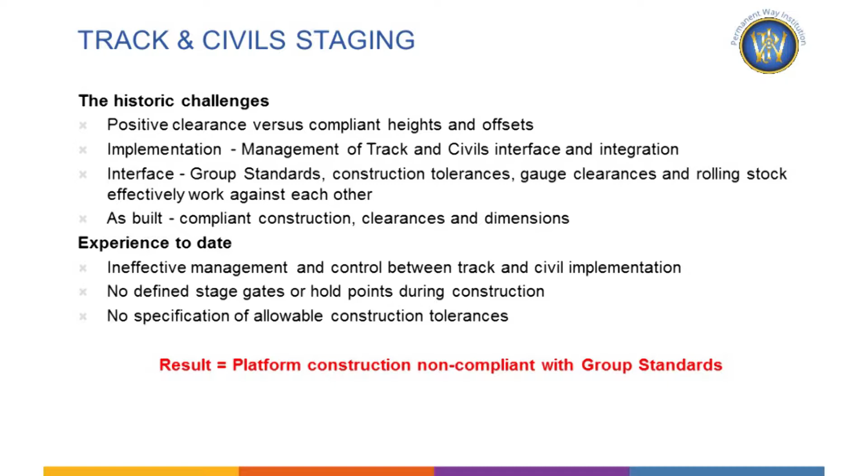And just at the bottom there, the result tends to be, in our experience, a non-compliance to a group standard. It's very difficult then in the end to get past somebody like the NoBo or the certification board, and then needing a derogation, which you shouldn't need in theory.

So items we've put in place across Phase 4 and 5: we developed what we classed, it's quite a snazzy title, an AIDD, Agreed Interface Definition Document. And the idea behind that was to pull together the civils and the track scope. So specification of platform heights and offsets, specification of enhanced construction tolerances where needed.

It coordinates the track and civils activities together with hold points in place and sign-off positions, ultimately ensuring compliance with group standards. And the bottom one, it specifies the key construction sequences and, more importantly, any hold points and handover points.

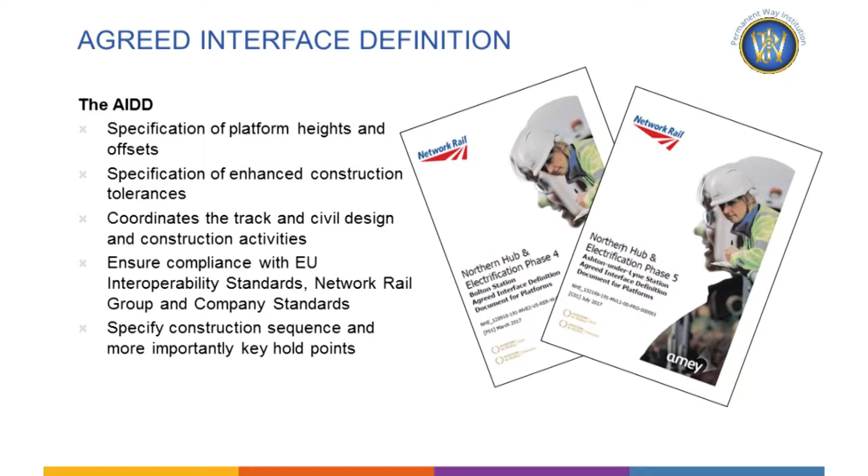And I think Neil touched on this in some of his slides in terms of compliance, and more on this slide in terms of as-built compliance. What does that actually mean? And I think there's definitely misunderstandings of that from a group standard point of view, from a gauging point of view. From a track point of view, it's quite straightforward. It's the track construction standards 2102 for a given line speed is the minimum that we'll achieve unless we specify

enhanced tolerances. In the group standard 7016, again, as Neil touched on, the Y dimension is typically 915, but you have got a 25mm corridor down to 890. And from an offset point of view, 730 plus 15. And the overarching mandate in 7073 is the prime requirement isn't necessarily normal clearances or reduced clearances, but positive clearances, making the best use of clearances versus stepping.

And an important one again that Neil touched on was in standard 7073, the maintain position and the effective position. The maintain position, in our terms, is almost identical to the reference position. It is the design position. And more importantly, the X and Y compliance on site is to that maintain position. It isn't to the as-built position or effective position.

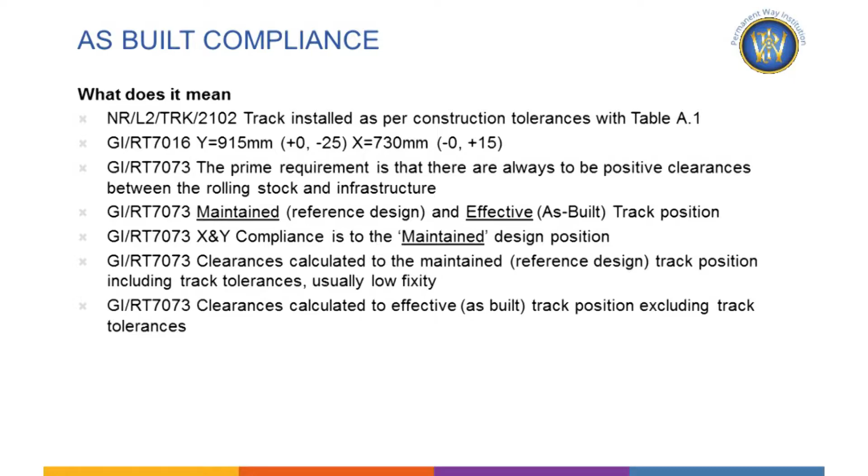And an important one at the bottom that we've worked on over the last couple of years: the design position is using all the track tolerances, whether that be low fixity, medium fixity or high fixity, in the clearances that are calculated. But in terms of the effective position and what is built on site, the actual clearances are calculated, in effect turning the tolerances off. It's a given position on a given day, with the clearances that you end up with at that time. So again, if that's positive, it is a compliance.

We're just going to come on now to some real-life experiences over two stations, Bolton Station and Ashton Station, which between them are both defined as CSM significant projects. So both fully reviewed by NoBo with a safety assessment report and TSI compliance as well.

So Bolton was a 9-day blockade. There's 5 platforms in that which were constructed by Buckingham's. 2 new platforms, Platform 5 and Platform 2, that were CSM significant, and then track tamping and full recopering across platforms 1, 3 and 4.

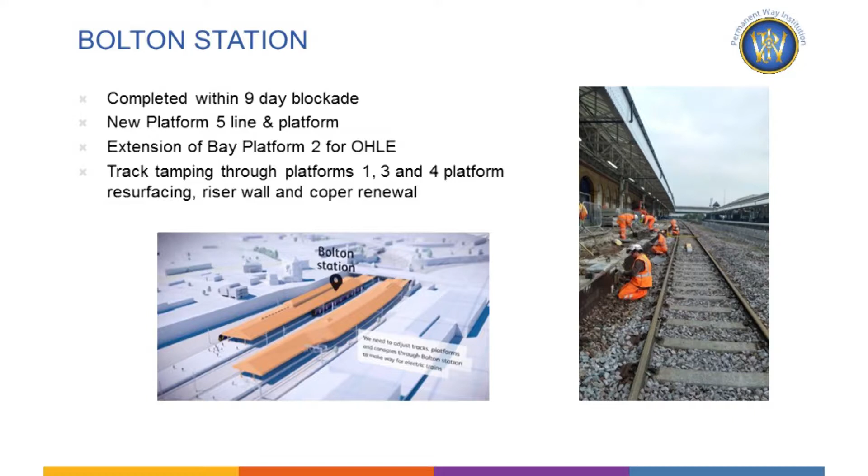We went into this with a type of proposal where we wanted to put in enhanced construction tolerances. So our idea would be that the track was installed first, and we'd build that to a very, very tight tolerance, well inside the track construction tolerances. So track vertically was plus 0, minus 10, and horizontally plus or minus 5.

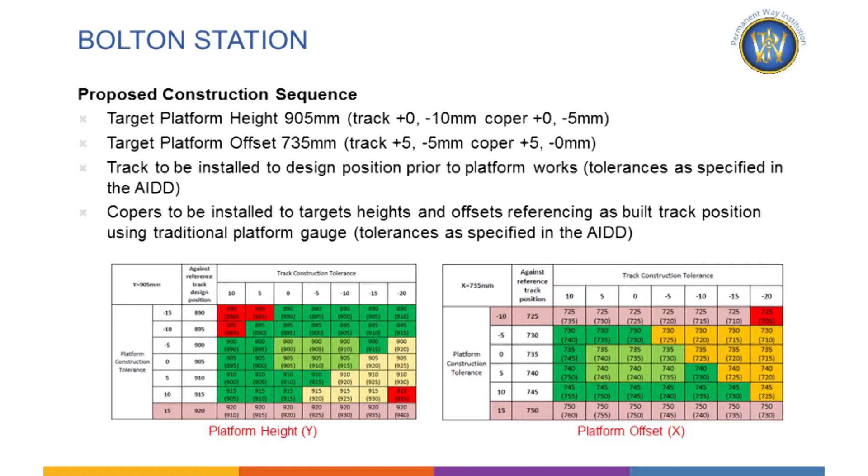And the idea behind that being the civils guys could then go out with their standard heights and offsets, 905 and 735, work to very tight tolerances of probably unachievable, plus 0, minus 5, and plus 5, minus 0. And if they did that, you would end up in the green boxes here, and you would have been compliant in the as-built position, and in the effective position, and in the maintained or design position.

But in real terms, we were in a 9-day blockade, a lot of pressure to get certain platforms open, and we never got the track within these enhanced tolerances. So a procedure we've then adopted really throughout Bolton Station was, because we couldn't achieve the tolerances, we then developed adjusted heights and offsets.

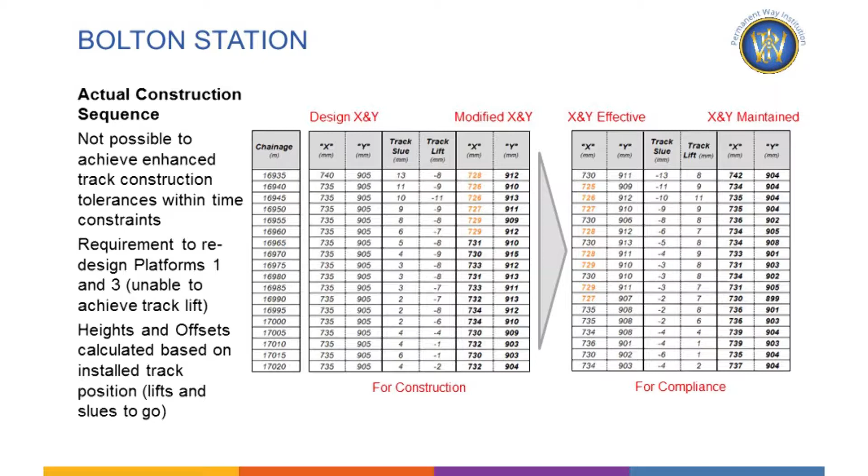So we had our design offsets for platforms, which were 905, 735. We had an as-built on site, that's the difference where we installed our track to. And these were modified X and Ys that the Buckingham Group installed on site with a specified tolerance. And based on that, that was their as-built position on site.

As Neil touched on, the as-built position or the effective position isn't the one that needs to be compliant against the group standard. That isn't the one that needs to be within 890 or 915 or 730, 745. It's the maintained position at the end. So as you can see as an example on, I think it was Bolton Platform 5, fully compliant, all heights and all offsets within the parameters of the group standard.

And that was, I think the next slide shows, mirrored across the platforms. So in terms of the two CSM significant ones, we had 100% compliance. So in terms of authorisation from the NoBo and the safety assessment body, that was fine.

And platforms 1, 3 and 4, these were built around existing track, and in the end the track itself was in relatively poor condition, with large lifts and large slues from a tamping point of view. But compliance wise, you can see over 95%, so still quite a good outcome in reality.

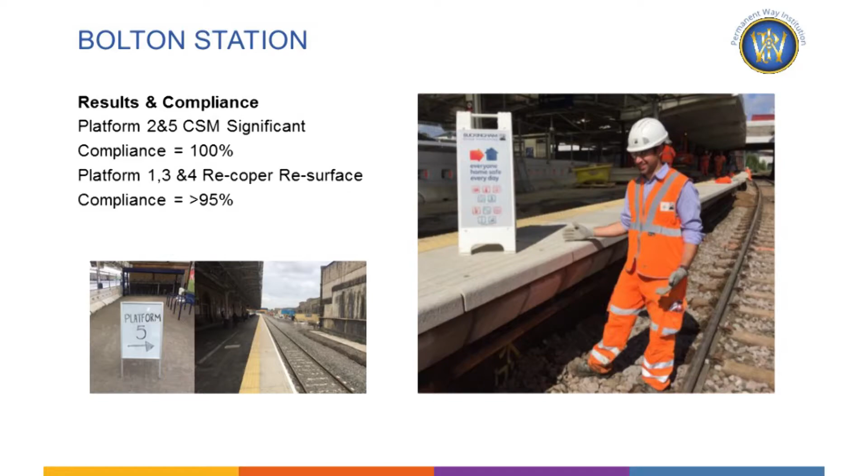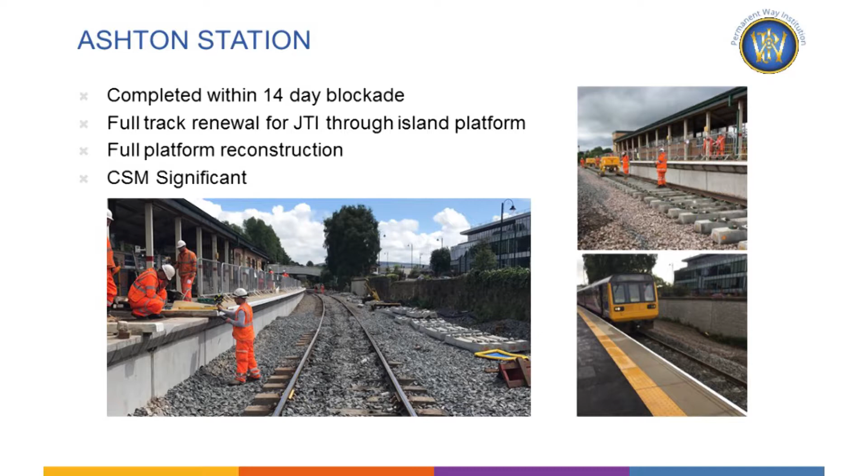The second station was Ashton Station. Again, this was a full station rebuild over a 14-day blockade. Full track renewal, full platform renewal, and again CSM significant. Now, the key difference on this project was due to the blockade and all the timings in the blockade, the platform was constructed without any track in situ.

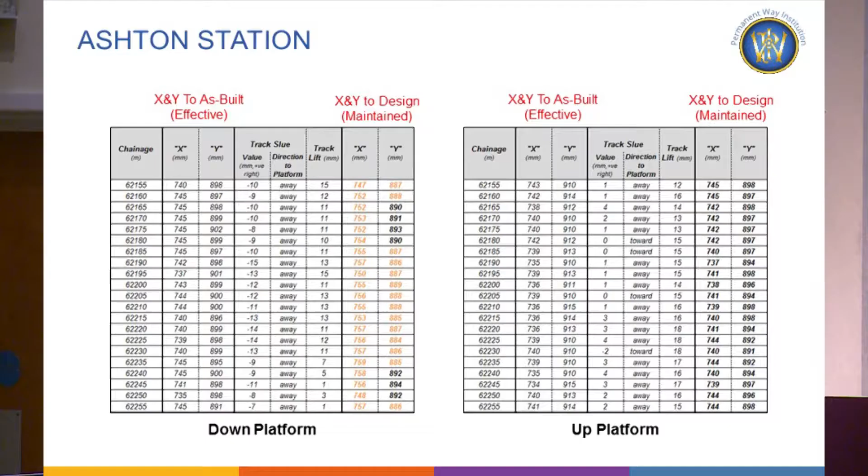So similar to the last point really. In effect, both platforms compliant in an as-built position, but looking at the down platform, once you implement the proposed lifts and slues to the design or to the maintained position, marginal non-compliances to the group standard.

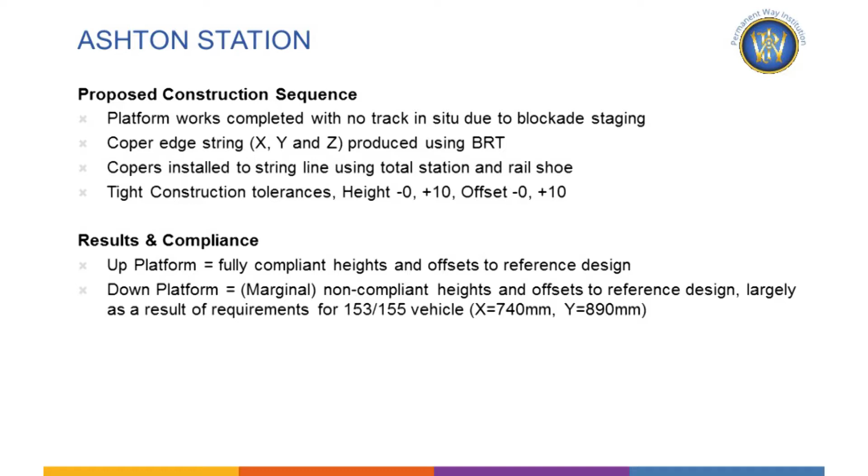And that was largely, if you look back at the previous slide, a result of specifying specific platform dimensions, 740 and 890, dictated by a rolling stock that operates on the route, and at this location more specifically, the 153 and 155. And I know Kev Mellor's in the room, so recently these guys have done work on them specific vehicles to improve the clearances. So in reality, this problem would not exist anymore.

So I think if we took the project on now, we would have specified more realistic heights and offsets, probably 900, 905, 915. And I think the compliance would have been much easier to achieve.

Just moving on to some lessons learned. Bolton Station was constructed in a traditional way: tracking first, platforming after, in a blockade scenario. As we touched on earlier, it was very difficult to achieve what we tried to achieve, tracking to very, very tight tolerances. We ended up with delays on site because of the blockade and because of the pressure.

The construction guys needed the X and Y's recalculating based on these bespoke heights and offsets before they could crack on site. So it did present a couple of delays during the project, and obviously copers couldn't be installed before the track works were completed.

And one interesting one, which I think is a really important one for traditional setting out: when we visited site one day, they were establishing a project chainage on site. The track guys had established a chainage, and the civils guys had established a chainage, and they were 2 metres apart. So there were two different marks for the same chainage. I think me and Andy touched on it yesterday. It's very important to mark out a common chainage. It's very, very important.

ASHTON presented different problems. This was installed with a coordinated system, with a rail shoe, no track in situ. We did loads of prep meetings with the Northern Programme Survey Manager. And even though we prepped, we still had issues with survey control on site, and it seems to be a common theme. Secondly, my experience is construction contractors don't like installing platforms to coordinated techniques. It did require an engineer or a surveyor to be on site all the time with that specific capability.

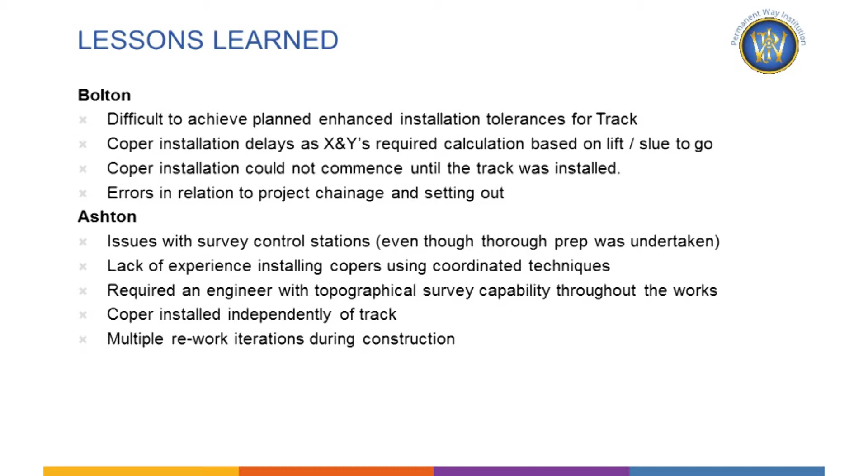And I think the main one: the copers are installed in that scenario independently of track, whereas the actual compliance, the group standard, is heights and offsets. So the two things are done separately. Your surveyors are there separately, surveying track and platforms. It's very difficult. What they ended up encountering with installing it coordinated, they had the copers up and down 5 or 6 times to get them in the right place. So quite challenging, I think.

And this was the final slide, just to touch on the pros and cons. There's probably no right or wrong way in reality. If you choose one way and it's dictated by certain scenarios on site, then that has to be the way it goes. But these are just pointers on the pros and cons for either.

So for traditional, in our opinion, the setting out is much quicker. Using a guy with a platform gauge, it's very quick. It gives you a direct reference to the track, whether that would be its effective position or maintained position. And there's no real specific competency needed to read a platform gauge. The cons: your copers cannot be installed until the track is in the right place. Chainage datum is a key one going forward. And it does require on-call design support in terms of generating platform heights and offsets.

From a coordinated point of view, obviously the platform can be installed without the track being in situ. I think there's a pro and a con for it being installed independently; I have it on both slides. And the coper string on curved platforms, and there are a lot of curved platforms in the country, you can pick a reading every metre, every 100 mil, every 5 metres, it's continuous. So it does aid on curved track.

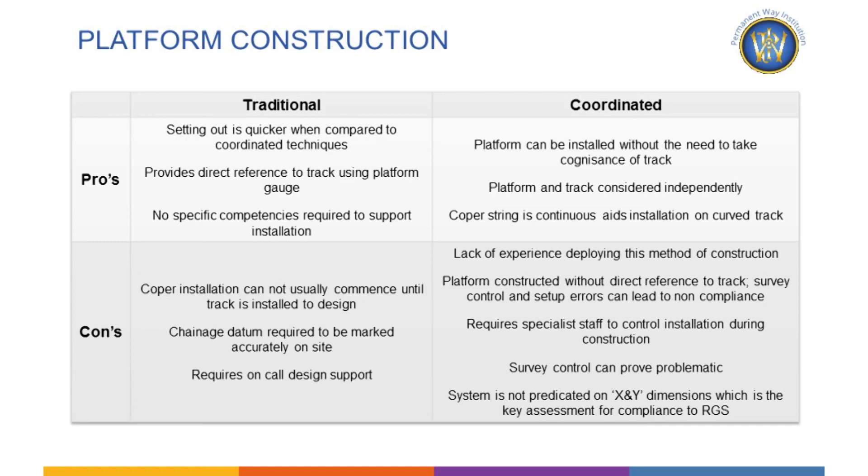And the last one, compliance isn't predicated on X and Y's, so trying to prove compliance against 7016 from a height and offset point of view can be difficult. You still need to use a platform gauge at the end of the day. So that was a summary of our last 2 years in BOLTON and ASHTON.